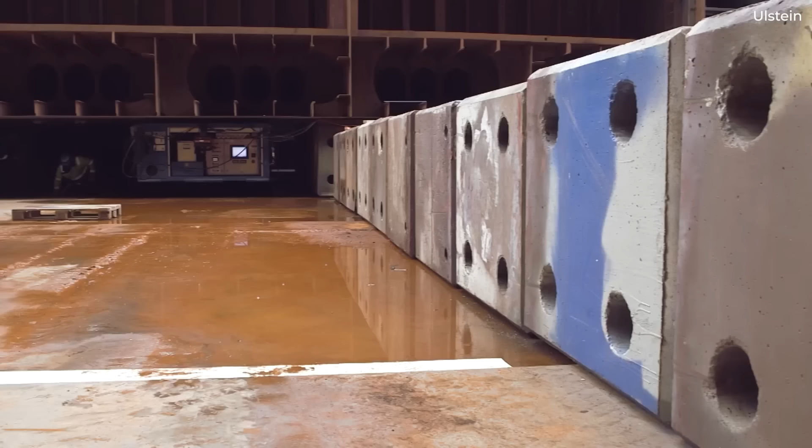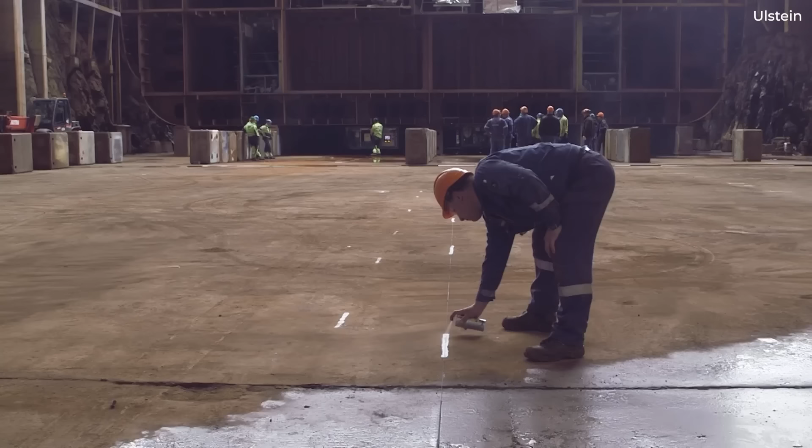Naval News says that the standardized vessels dedicated for Coast Guard work would have certain modifications, but would also be capable of accommodating the modular systems used by the Navy. Norway wants to start building the first vessel in 2027, with delivery in 2030. Seeing that a tender would mean a lot of work and money for the chosen contractor, it's said that there is already a good deal of interest from a number of Norwegian yards and design bureaus.

Let's go over 2 that have surfaced in recent times. First up is Norwegian offshore heavyweight Ulstein, who announced an intention to bid in mid-December 2025. The offer would see a collaboration with Norwegian shipyard Larsnes Verkstad. As explained on the Ulstein webpage, Larsnes and Ulstein have already delivered 65 vessels ranging from 36 to 160 meters over the past 15 years, averaging 4 vessels per year. The yards have experience in both new builds and parallel life cycle services for working ships.

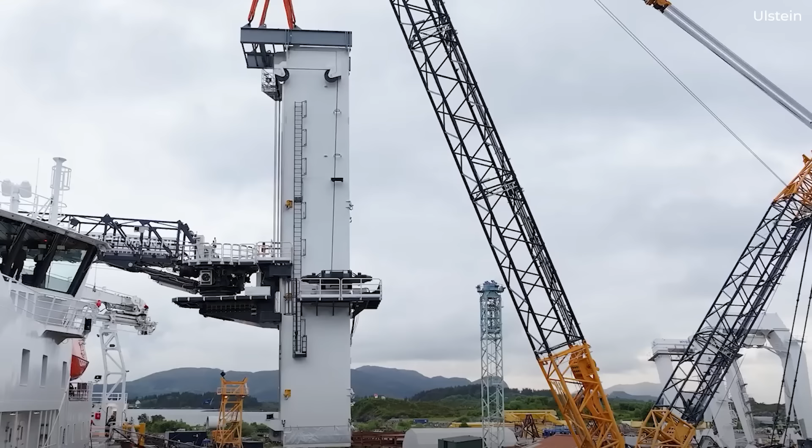The combined capacity would enable the design, engineering, construction, testing and completion of all 28 standard vessels for the Navy, as well as full life cycle support, including repairs, maintenance, upgrades and digital services to ensure optimal operations. Ulstein says that the most critical aspect of Norway's project is the integration of military systems into civilian platforms, which requires structured collaboration, clear interfaces and close dialogue with defense stakeholders. As such, the bid from Larsnes and Ulstein includes cooperation with hull producers in Gdańsk and Gdynia in Poland.

Releasing preliminary designs in a separate press release the same day, Ulstein states that the design strategy behind these concepts is to develop an efficient maritime platform with a flexible deck arrangement that can be tailored to the varied mission requirements the vessels will face throughout their service lives. Adaptability is a fundamental principle, and the concepts are designed to be easy to maintain, upgrade, and update, enabling them to meet future needs effectively.

The design has 4 features highlighted. 1. A flexible platform deck. 2. The X-Bow proprietary hull design that delivers superior seakeeping, reduced fuel consumption, and lower emissions. 3. Energy-efficient operations thanks to Ulstein Power VSG propulsion and energy systems. And 4, being, quote, as civilian as possible to offer a safe, comfortable and attractive working environment. On this note, Ulstein says that the ships are designed for minimal motion and cabins and common areas are close to commercial standards to enhance the vessel's attractiveness as a workplace.

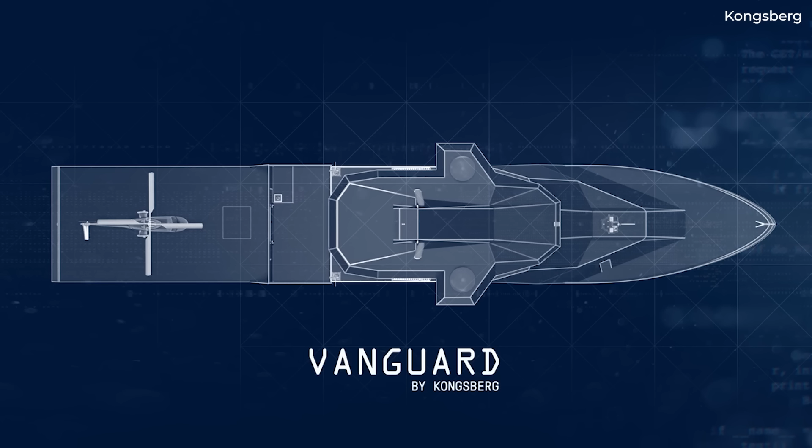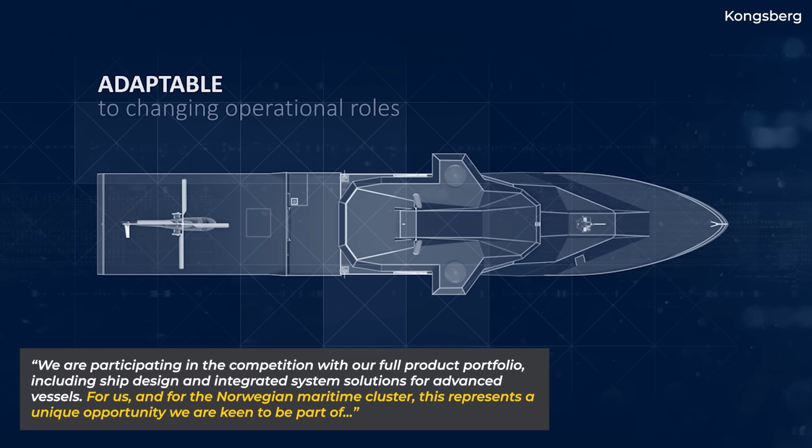So that's the bid from Ulstein. The other bid we'll look at is the one from Kongsberg Maritime, who announced on January 22nd that it would be participating in the pre-qualification phase of the competition for the Royal Norwegian Navy's new standardized vessels. Håvard Siljan Yuksa, Executive Vice President at Kongsberg Maritime, was quoted as saying, We are participating in the competition with our full product portfolio, including ship design and integrated system solutions for advanced vessels. For us and for the Norwegian maritime cluster, this represents a unique opportunity we are keen to be part of.

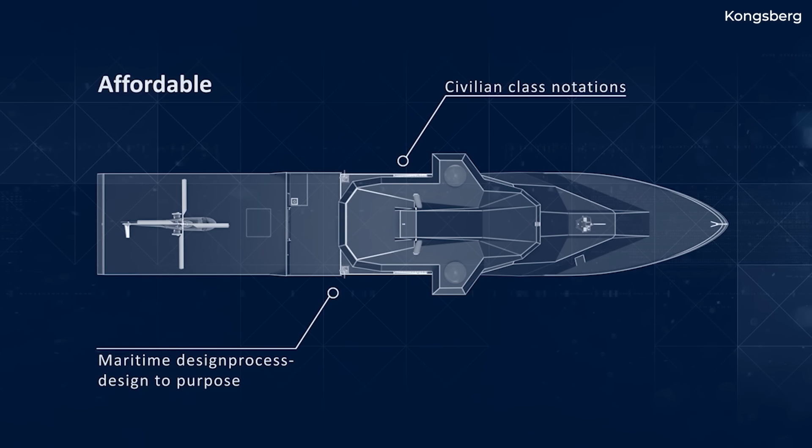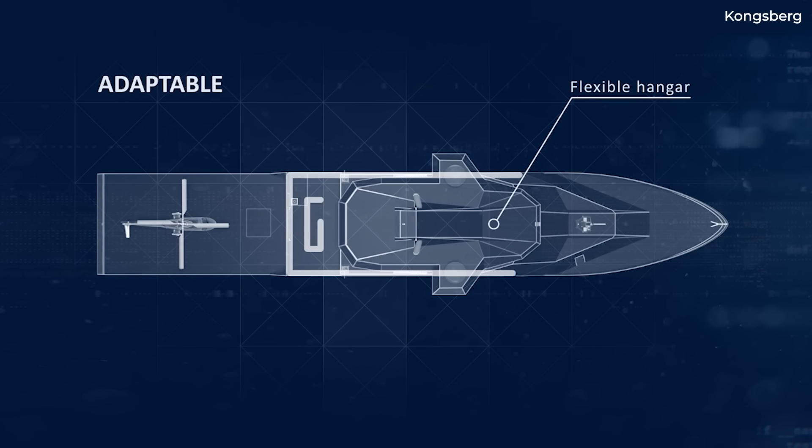It's added that Kongsberg Maritime is currently a key system supplier to the British, Canadian, Australian and Norwegian Type 26 frigates, providing several of the most critical maritime systems on board. Despite the press release announcing the intention to participate, Kongsberg didn't offer the same level of detail as Ulstein regarding design. In fact, all we got was this one render. Of course, this will undoubtedly come in the near future. Nonetheless, we're sure the company's Vanguard system will be a big part of Kongsberg Maritime's concept and design, even if it wasn't stated.

But that's a little bit about Norway's large naval fleet standardization project and 2 bids being put forward thus far. What do you think about this massive undertaking